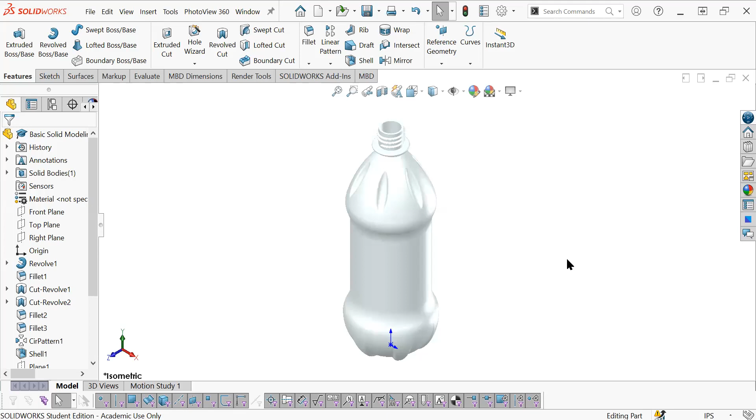In this video, we are going to draw this plastic bottle in Solidworks. So the first thing you're going to do is open up this startup file from Canvas.

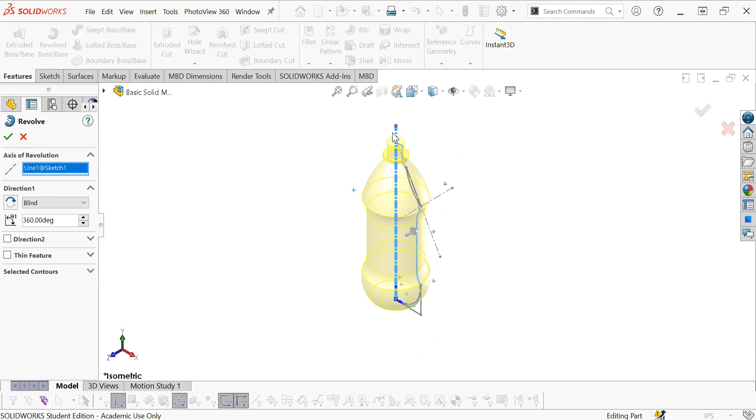Select Sketch 1, and then in the Features tab, click Revolved Boss Base. We're going to keep all of these settings the same because it automatically chose line 1 for the sketch. So we're going to revolve this sketch about this line 1 center line and click check.

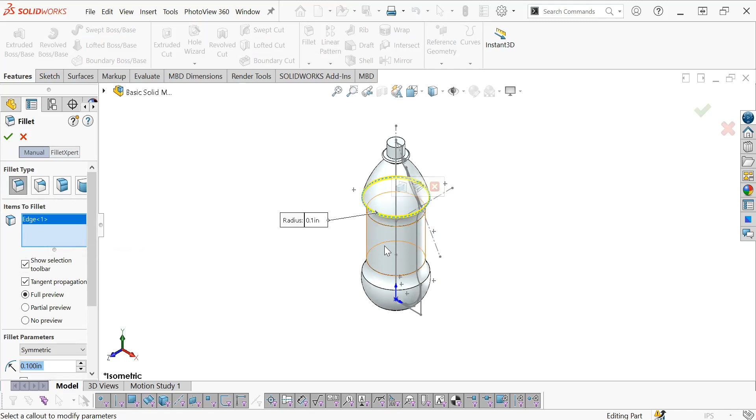The next step is to add fillets to the bottle. So we're going to go to the Features tab, Fillet Command. And for items to fillet, we're going to select this edge, make sure you select the edge, and then this edge right here. The parameter is going to be 0.1 inches. Then click OK.

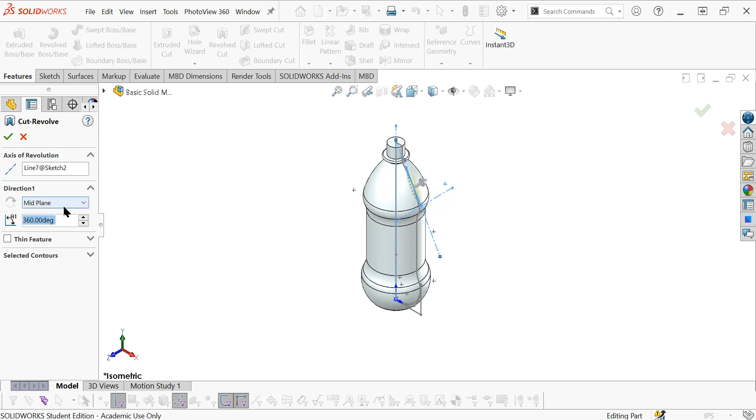The next thing we are going to do is create these upper cuts, the divots at the top here. So we're going to select Sketch 2 and use a revolved cut. For the axis of revolution, we're going to use this center line right here. And for the extrude cut option, we're going to use... I'm sorry, we're not going to use mid-plane, we're going to use blind, with an angle of 360 degrees. Then click OK.

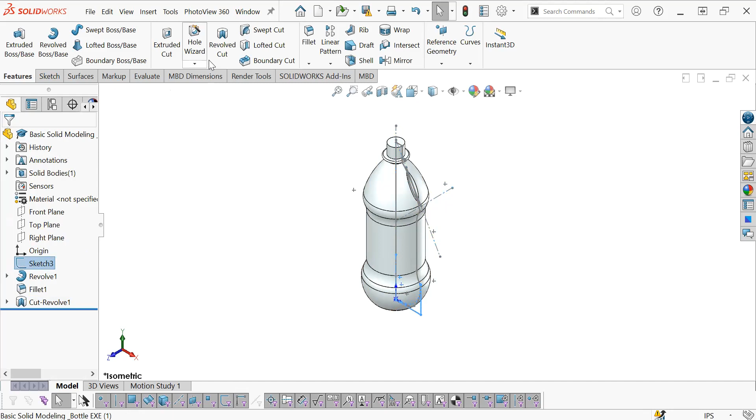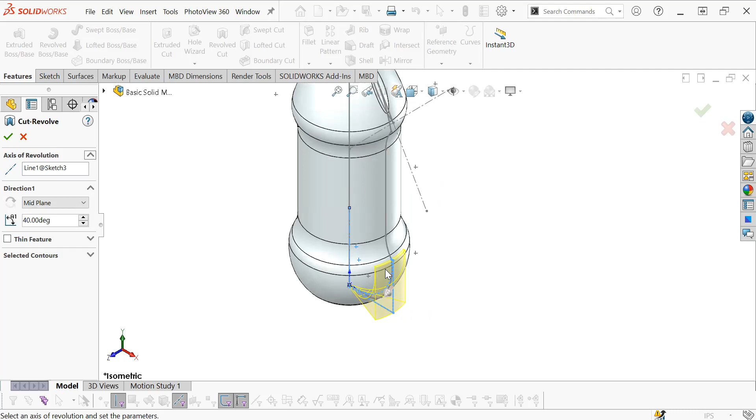The next step is to create the lower cut down here. So we are going to select Sketch 3 this time and click Revolved Cut. This time we're going to use the mid-plane, and for the direction, we are going to use 40 degrees. You can see that the revolved cut's going to start in the center here from where our line 1 is, and then it's going to revolve equally on both sides by a total of 40 degrees. Then we're going to click check. Now we have the lower cuts.

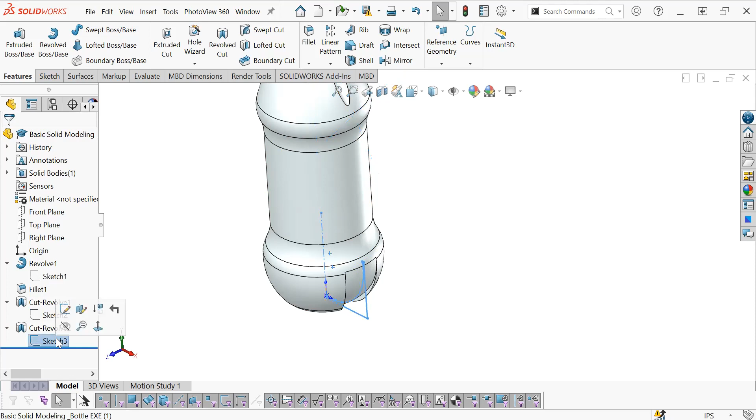Now, before we add our fillets, we're going to expand these features and hide these sketches because we no longer need them. So just click on the sketches and click the eye with the slash through it to hide the sketch. Then I'm going to hit Control-7 on my keyboard to make this a normal view.

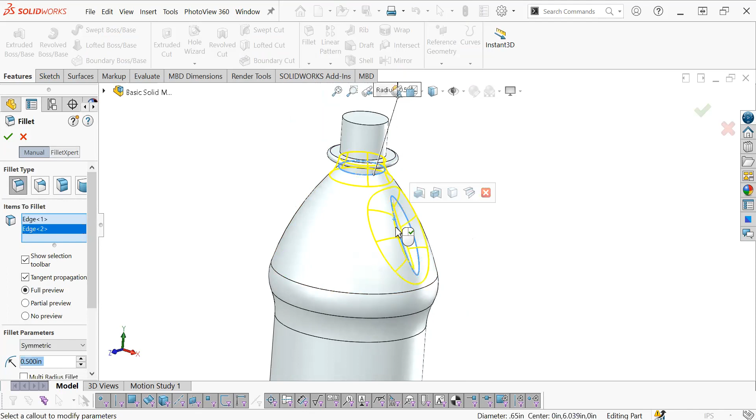Now I can go ahead and add fillets. So click the fillet command, and for items to fillet, we are going to rotate. Click that edge, this edge right here. And then for the first fillet, make sure to select the inside edges of the lower cut.

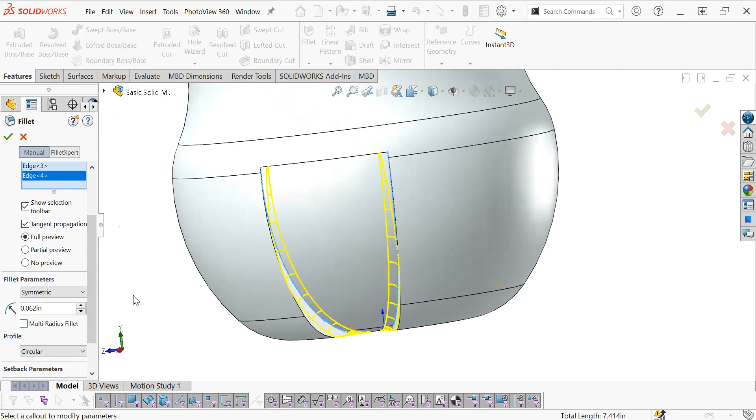And for the fillet parameter, we're going to use 0.062. Then click OK.

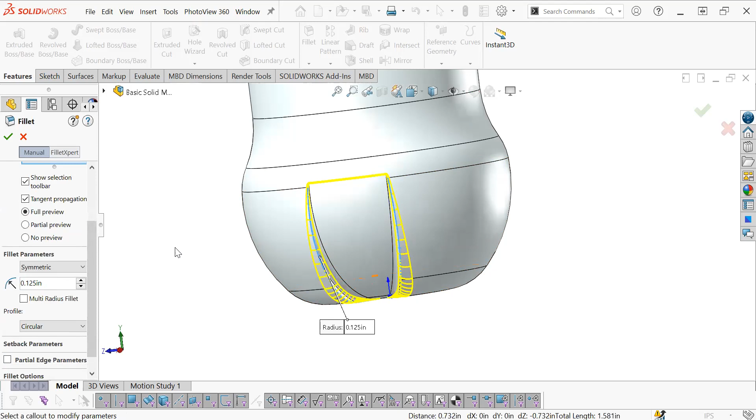Now we're going to add fillets to these outer edges right there. So click the fillet command. Then for items to fillet, we want to fillet these outer edges right here. It selected everything already because they're tangent to one another, but I just selected both edges because that's what it says in the book. For the actual parameter, we are going to add 0.125 as our fillet radius size, and then click OK.

Now we're going to add a circular pattern, which is going to create this upper cut and lower cut all the way around our plastic bottle. So in the Features tab, click the arrow under Linear Pattern, and then click Circular Pattern. For the direction, we're going to click this edge here, because we just want our circular pattern to revolve in this circular shape.

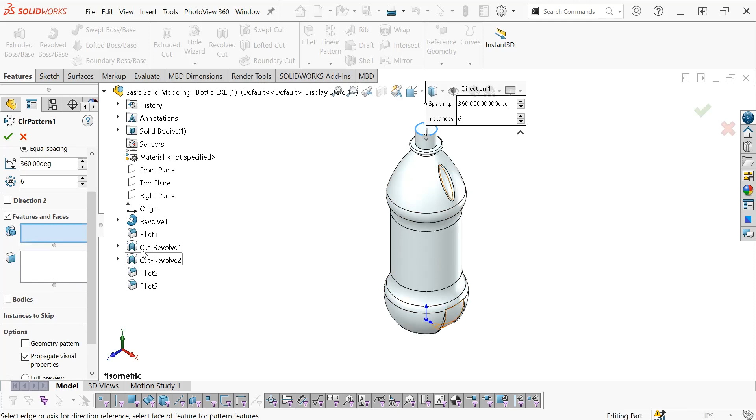We want to have equal spacing, and the number of instances, make sure that says 6. Make sure to click this first box right here, because this is going to be the features. Don't click this bottom one because that's faces to pattern. So we're going to expand our feature manager tree, and we're going to click the last 4 features, which are the 2 cuts and the fillets on those cuts, and then click OK.

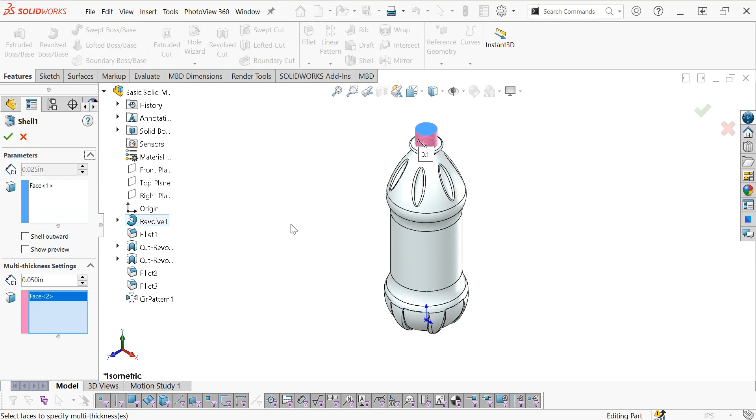And we're going to have a parameter of 0.05. What that's going to do is make this section up here have a wall thickness of 0.05, and the rest of the thickness is going to be 0.025.

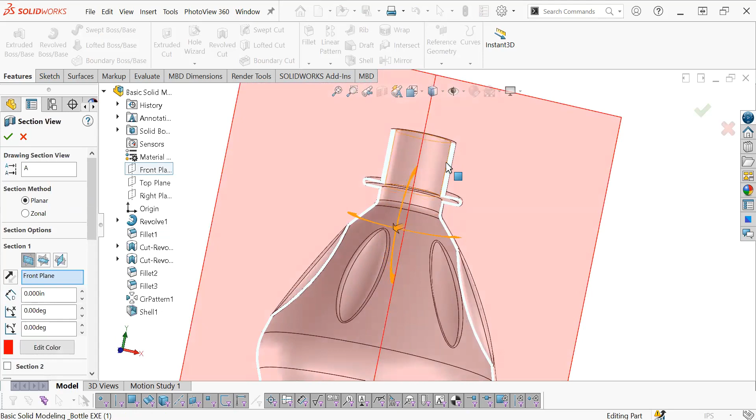Then we're going to click the check, and make sure that was done correctly. So in the heads up toolbar, click the section view. It automatically selected the front plane. I'm going to rotate, and you can see how this part up here is thicker than the rest of the plastic shell. So we know this worked correctly, and only this part has the 0.05 inches and the rest has 0.025.

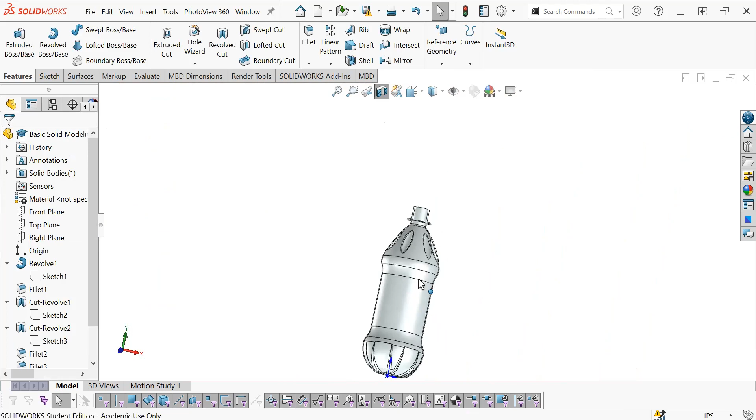And then we're going to click check. That's going to keep our section view, but we don't want this section view anymore, so we're going to click it again. So there's no longer a section view.

The last step is going to be adding this thread at the top of our plastic bottle. So we're just going to review this quickly before we get started. The first step is to create this plane, and the plane is going to allow us to create this helix. In order to create the helix, we need to create a sketch circle. So we're going to start the helix here and add parameters so that the helix spirals up to here.

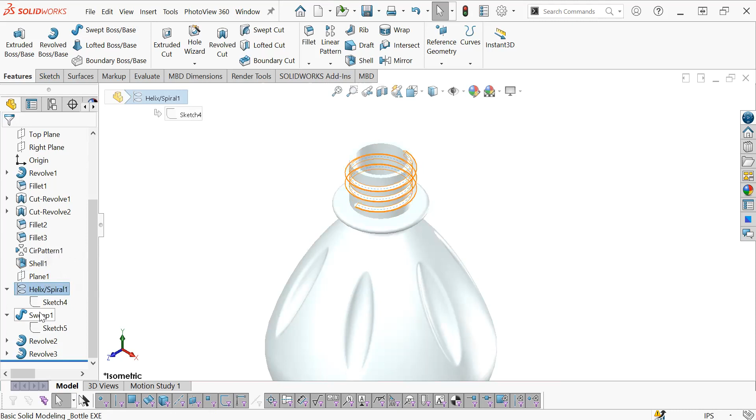And then after we have this helix, we are going to create a sketch. For the sweep command, we need a profile and a path. So this sketch right here is going to be our profile that we want to sweep around this spiral, and that will create this body right here. And we're just going to close off the end caps with these last 2 revolves.

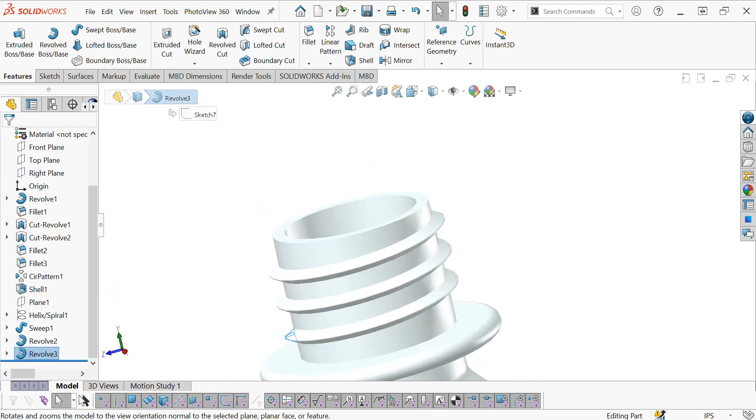So let's do that. If I go back to my model, I'm going to first create a plane from this top face right here, or planar surface. So we're going to go to reference geometry, click plane. We're going to click this top face, and for the distance, make sure that this is 0.4.

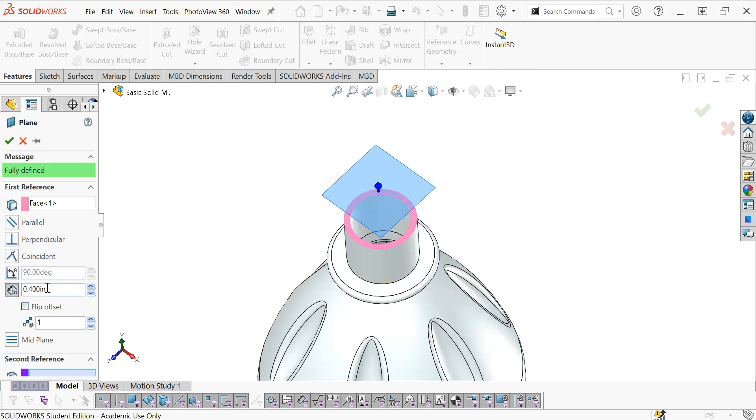You can see that the plane is above my plastic bottle, so I want to click flip offset so that it's in the right spot, and then click OK.

Then I want to click the plane and click sketch. So you can sketch a circle here, or I can use an existing edge to create my sketch for me, which I'm going to do. So I'm going to click this outer edge of the bottle.

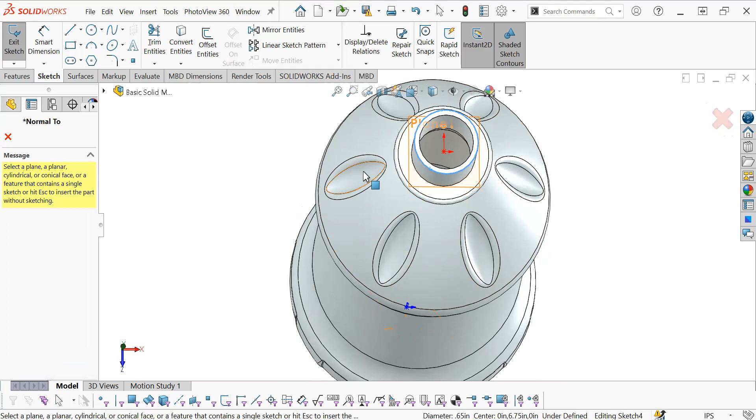I'm going to hit Control... I hit Control 8 because I want it to be normal to this view. But I'm going to hit this outer edge here and then click Convert Entities. And you can see that what happened was it converted this edge into a sketch on our plane that we just created.

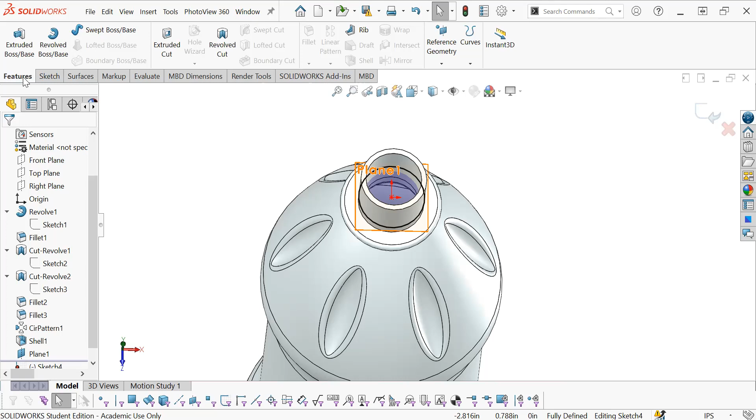So now I'm going to go to the Features tab and click Curves, Helix Spiral. I want to use the constant pitch option with 0.125 inches as my pitch. The revolutions is going to be 2.5 revolutions, and the start angle is going to be 0 degrees.

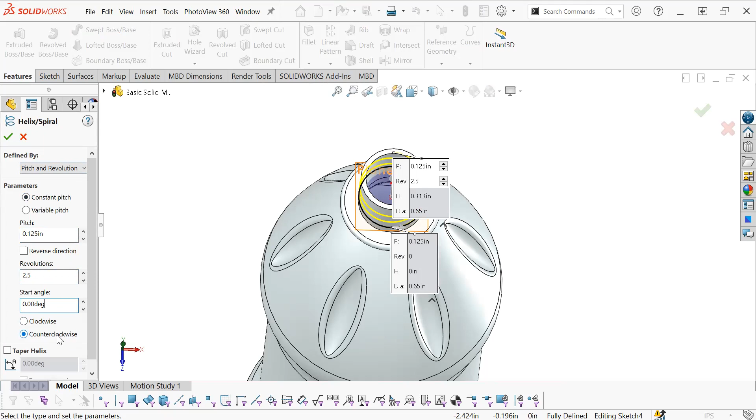In the book, it says clockwise. However, if you look at the image, it is counterclockwise, and that's how bottles work too. If you have a water bottle near you, you can see that it actually is in the counterclockwise direction. So I'm going to select counterclockwise, even though the book says clockwise. And then I'm going to hit check.

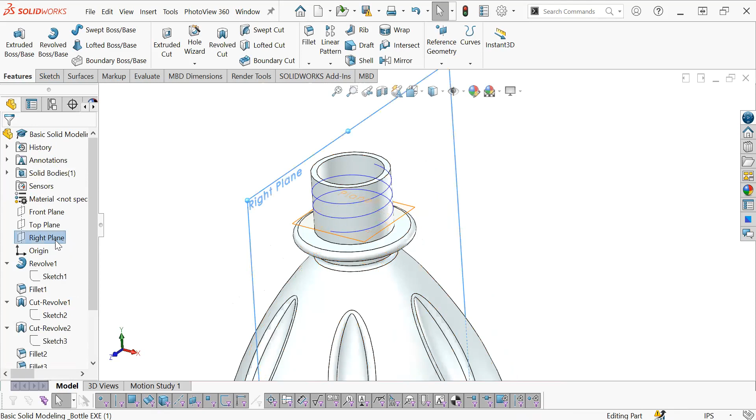And so now we have the path for our sweep, but we need a sketch to actually sweep around this path. So we're going to create that. We're going to click the right plane and then new sketch on there. Over here, I'm going to zoom in to the right side of my bottle. I'm going to click the line command, and I'm just going to rough sketch a half or a triangle.

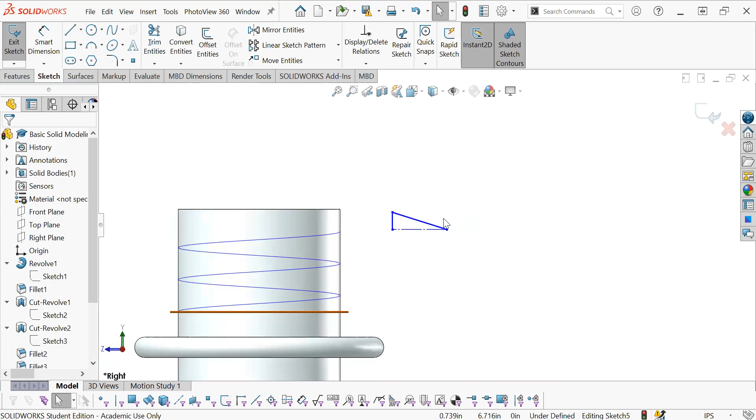Escape to deselect my items. Then I'm going to click on this bottom line, and I'm going to go over here and click for construction, and that will make this usable as a center line. Next, I'm going to go to mirror entities, and for my entities to mirror, I want to mirror these two lines, and I want to mirror about this line right there, and then click check.

Right, so now these are symmetric about this center line here, and we can start adding dimensions. So click Smart Dimension and click this angled line and this other angled line, and we want this to be 60 degrees.

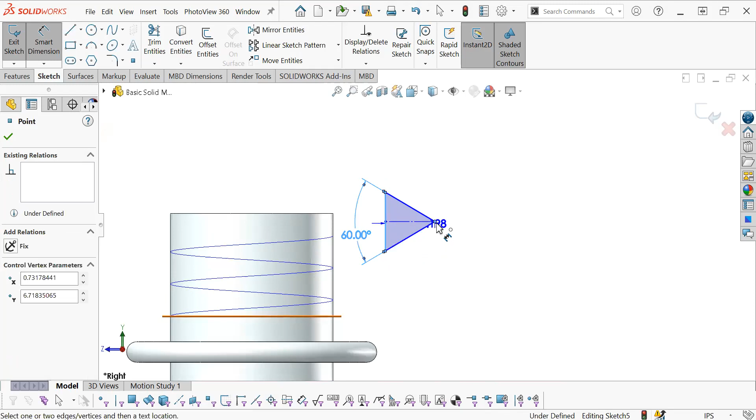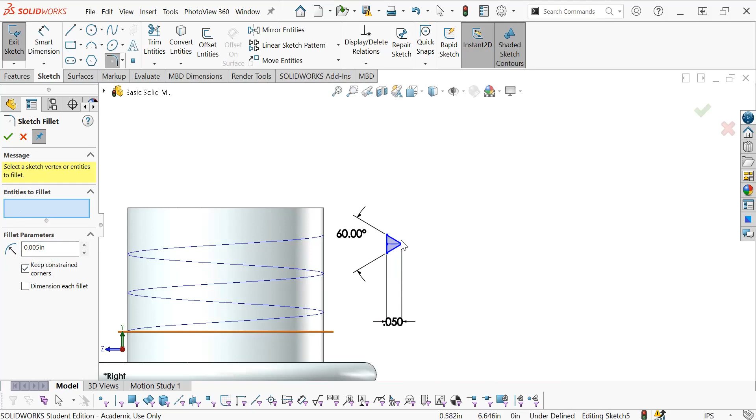And then we want from here, this vertical line to this point to be 0.05, enter. The next step is to click the fillet command, and we want our fillet parameter to be 0.005, a radius of 0.005. Entities to fillet, I need to click on this point right here so it fillets that corner, and click check.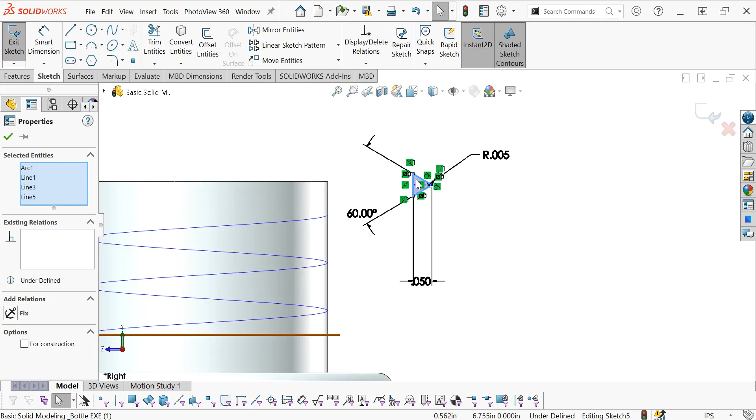I'm going to click check again so it exits out of the command. I'm going to move this dimension out there. We can see that this profile is still underdefined from our status bar, because if you click your profile and move it, you can move it all around, and that's why it's underdefined. So what we're going to do is hold Control on our keyboard, click this center point of the line, or the end point of this center line.

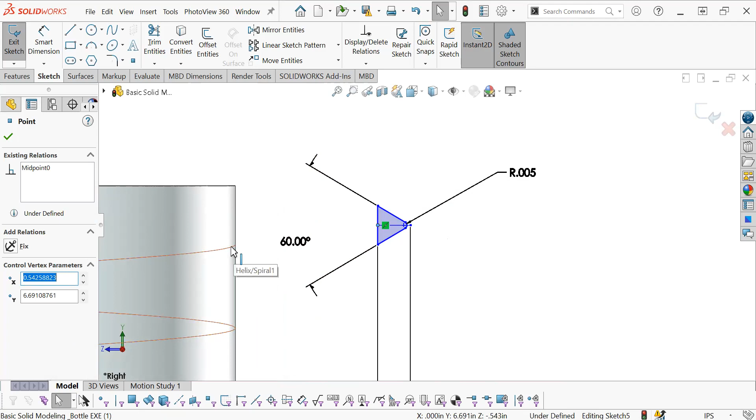Then hold Control and click the helix. So it's selected, or you can click once it's orange because you're hovering over it. I have both of those selected now. What I'm going to add is a pierce relation.

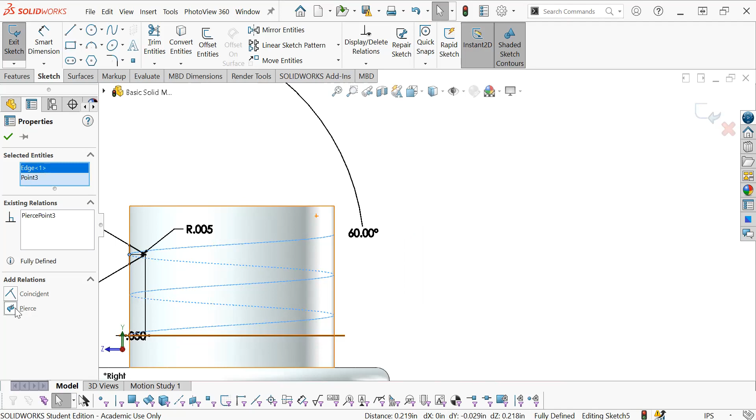Hold on one second, I'm going to do clear selection and do that. I'm going to Control Z, I think I selected the wrong thing. But what the pierce relation is going to do is it's going to

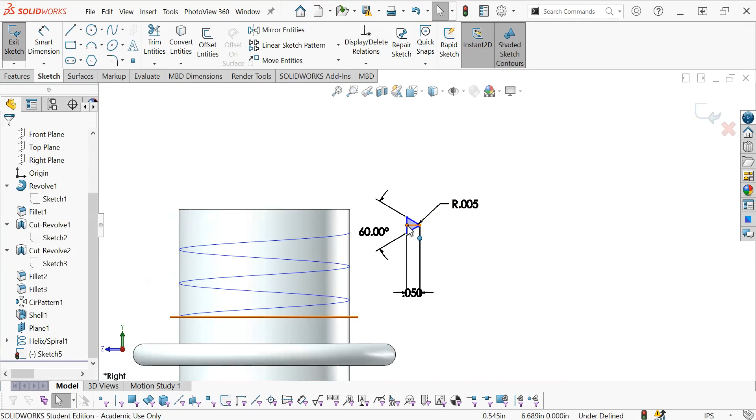Snap or move this point right here to the closest end of this helix. If I look at this helix, I would hope the closest point is right there. So I'm going to do that one more time: hold Control, click the endpoint of that center line, then click this helix and click pierce.

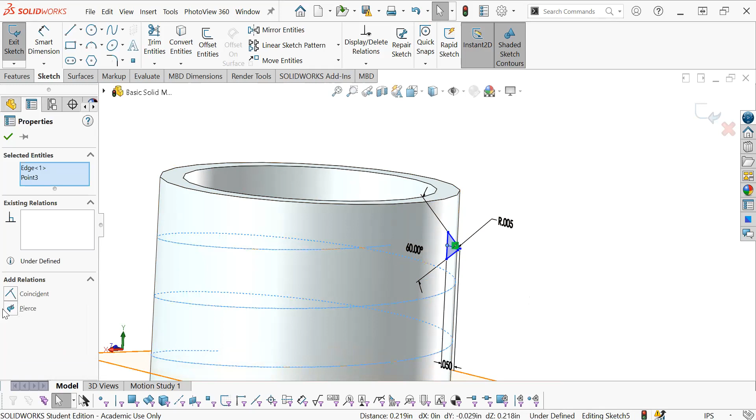And you can see that this sketch is now attached to this helix. So when we use the sweep command, these profiles need to be touching there. Click check, then exit sketch. Now I can use the sweep command and sweep this profile around this path.

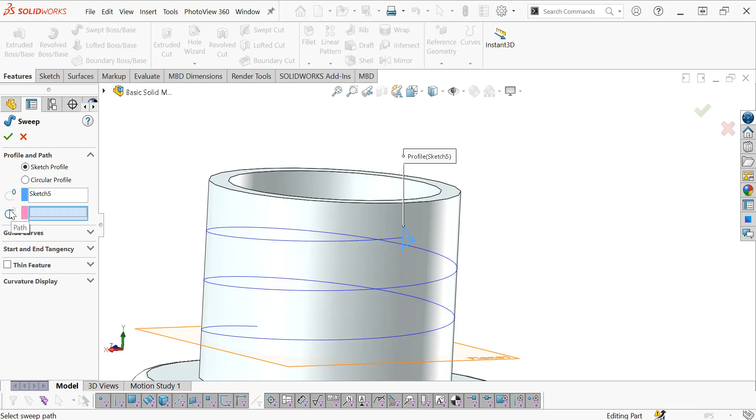So go to the swept boss base. If you hover over, the first item is the profile, and that's going to be this sketch here. Just click any line in the sketch, and the path is going to be the helix. You can see that's what created our thread shape. And then click check.

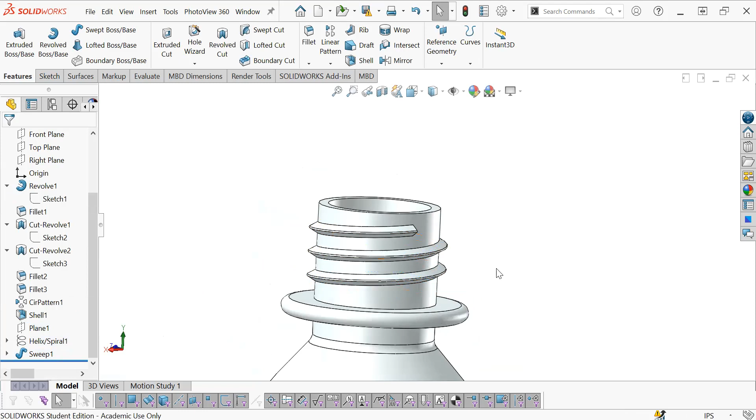Then I'm just going to hide the helix. So click the helix and click hide. I'm also going to click the plane and hit hide as well. And Control-7 on my keyboard to make this an isometric view.

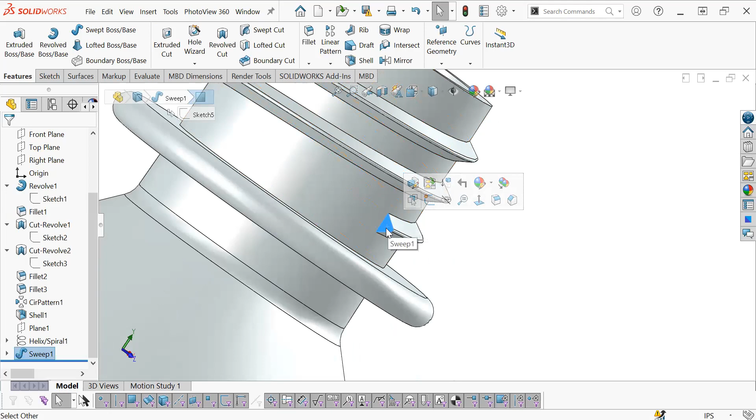And the last step is to close the ends of this, and we're just going to use a revolve for that. So we're just going to click the end face of the sweep that we just did and click sketch. Then Control-8 if yours didn't go to normal view. If yours is not blue, click this again. If it is blue, just move forward.

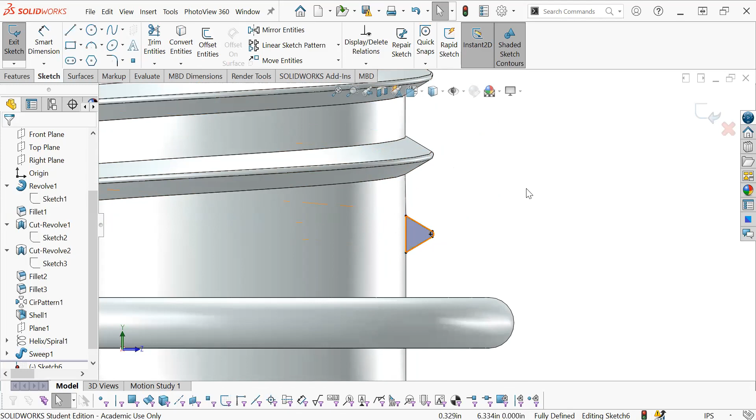The first thing we're going to do is just click Convert Entities. You can add a center line if you want, but it's not necessary because we can just use this line to revolve. We're going to use this as our axis of revolution, and it'll just revolve this all the way to this face here.

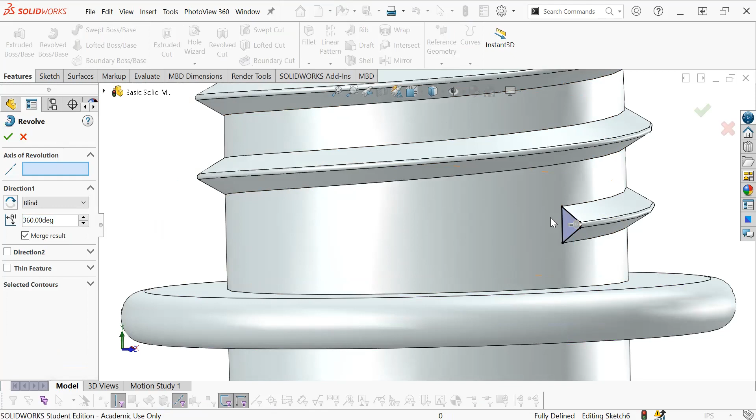So we're going to go to the Features tab, and we're going to click Revolved Boss Base. The axis of revolution is going to be this line right here. And you can see right now it's 360. So if I rotate inside, it's going to revolve inside here.

We don't want that piece of material there, so we're going to change the angle to 100 degrees. And now it's not going to revolve inside there. And then we're going to click check.

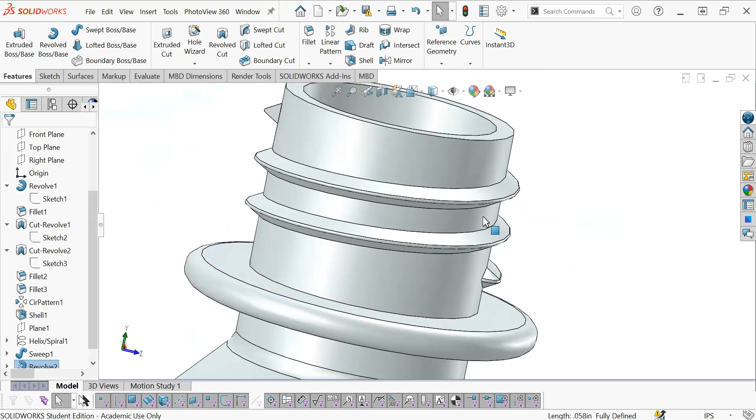Then just do this on the other side. So click this face on the other side, new sketch. Make sure that's selected and click Convert Entities.

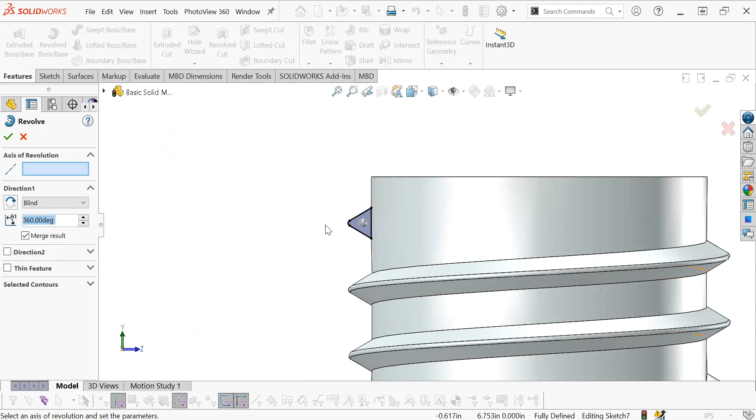And then go to the Features tab. We're going to do the Revolved Boss Base again. Axis of revolution is going to be this line, and the degrees is going to be 100 degrees. Then check, Control-7, and your bottle is now complete.